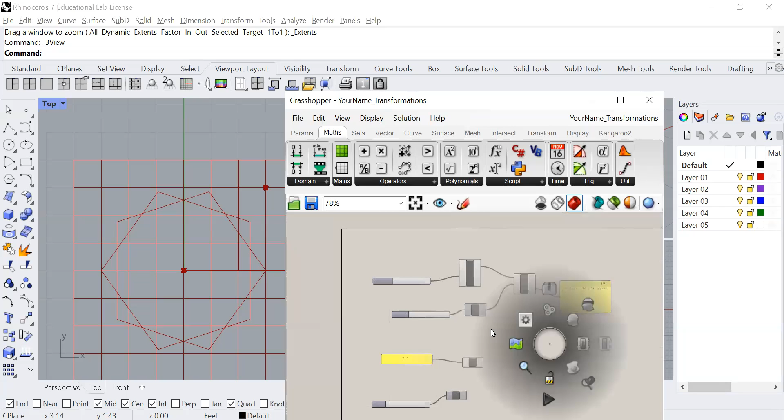Okay, the next tool is scale. So I'm going to disconnect some of these components, control, and here I'll move the rotate tool over here, and I'll bring up the scale tool. There you go.

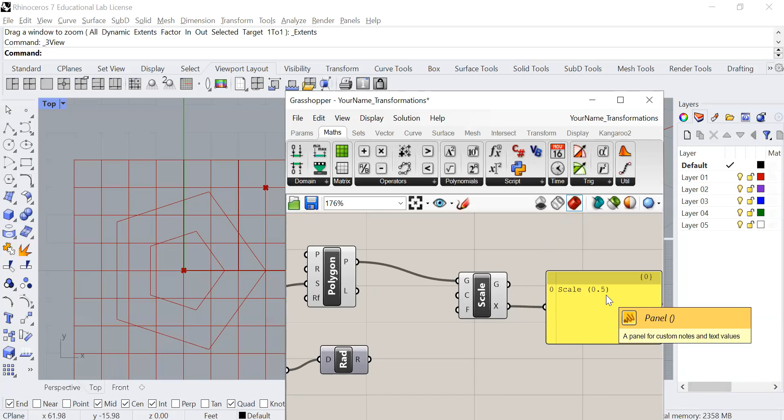Okay, so let's connect in the geometry, and you can see by default that it's made this copy at 50%, or a scale factor of 0.5. So I have a couple of inputs that I could change. One of them, and let's move this radians tool.

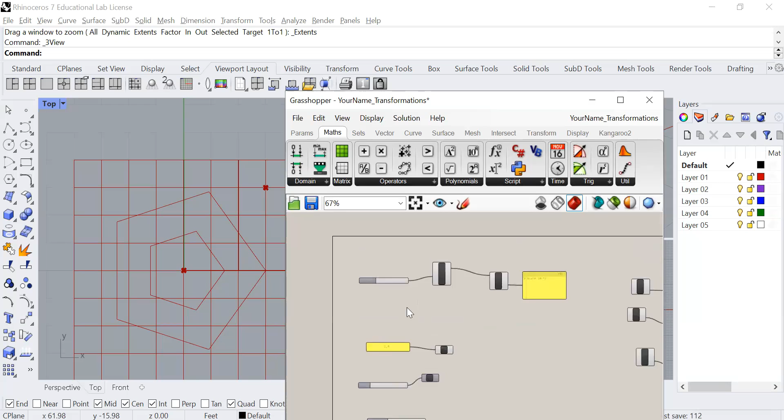Input here, and I'm going to need a slider. I'll copy this one here, bring it over, and connect it in. Okay, so this slider is basically starting from same size to, it can't do 0, 100%.

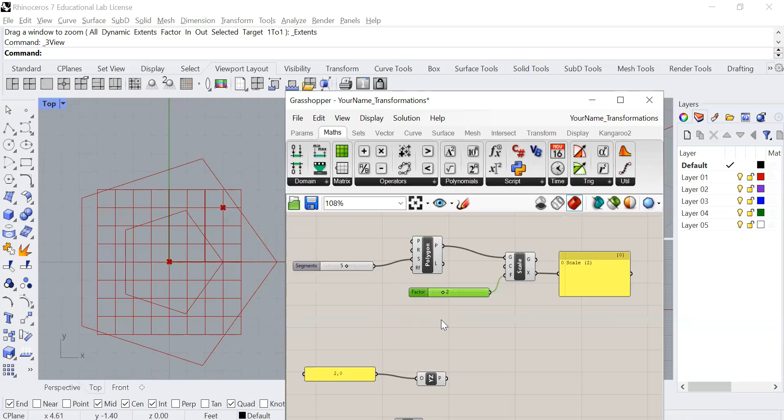Now it's doubling it. This is something that maybe you would want to alter the number of decimals, so that this is whole numbers right now. If I was to drop this down and allow 3 digits or 2 digits, so I can get 2 decimal points, that may give me a little bit more to work with.

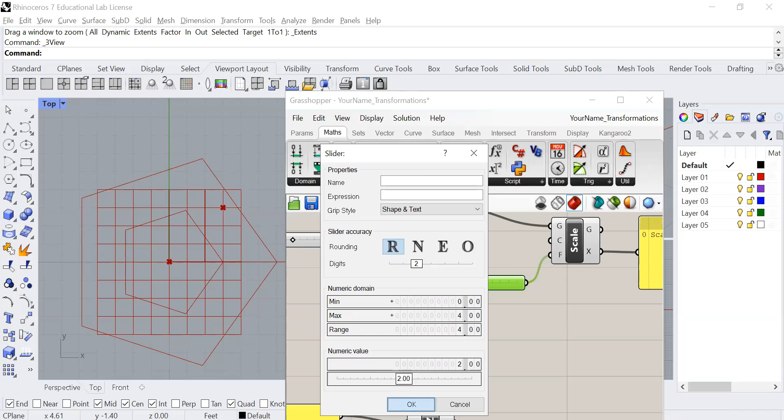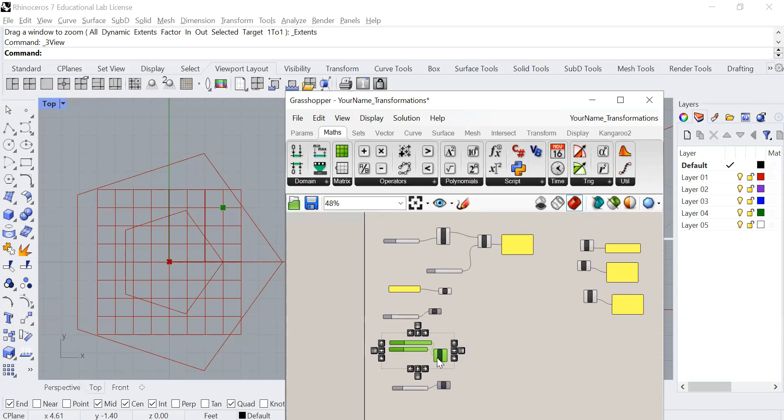I could also change this to maybe a smaller number. So you can kind of see how those scale factors will work. I can also change the center point for the scaling. So let's see here. If I was to take this and move it up here

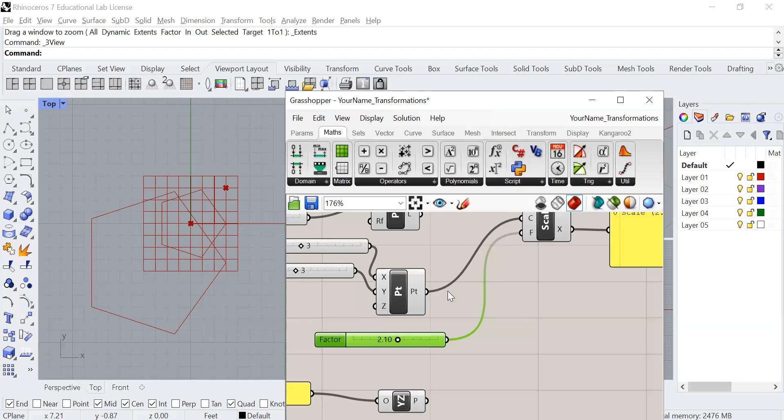and connect it in to this position, you can see that it's still scaling it by whatever factor I've changed this number slider to represent. But it also generated a reference point about which to increase the scale. So let's bring both of them down to 0. That's where the default position would have been.

So if we didn't have any point assigned here, you can see as I move the X coordinate to the right, the actual scaling is happening to the left. So it's acting as a kind of a reference point. Okay, so that's all you need to do for the scale tool. So I'll make my screenshot of this one too.